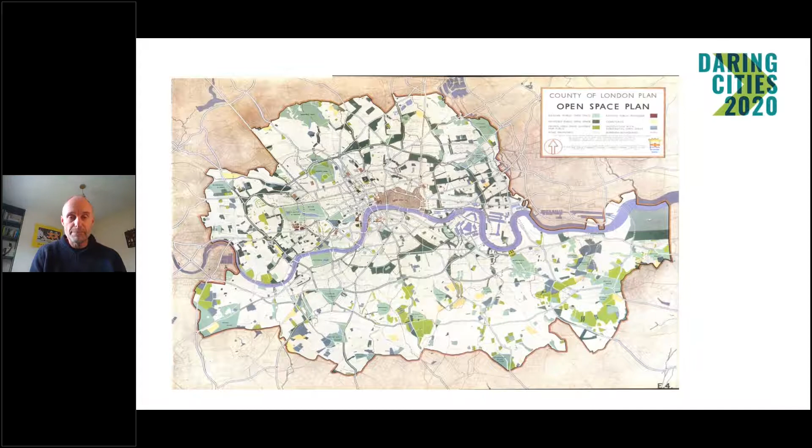Next slide please. So London today is a growing city, currently 8 million people.

We expect to have 12 million people by 2050. And that city has to become much denser than it is now. We can't spread outwards anymore. We have to become more dense.

But we also have to address issues around maintaining that access to green space, which has been a hallmark of London for decades.

And dealing with the modern challenges of a future city. Things like air pollution, which has been a critical issue in London. And the impacts of climate change, which not only have health impact, they have an economic impact. Many businesses in London now are very worried about the impact of climate change, particularly in central London, where it becomes unpleasant to travel during the heat of the summer.

So what are the sort of things we're doing in London to try and combat that, to try and create this healthier, denser, but greener city?

Some of the things we can do are to improve our existing green spaces. We can take existing areas of green space which don't perform particularly well and rewild them, recreate rivers to create a much more aesthetically pleasing green space, but also a green space that combats flooding and provides a whole range of protections and environmental enhancements and better for biodiversity.

So these are sort of things we can do in most of our parks in London, recreating sort of natural environments that are good for health and good for biodiversity.

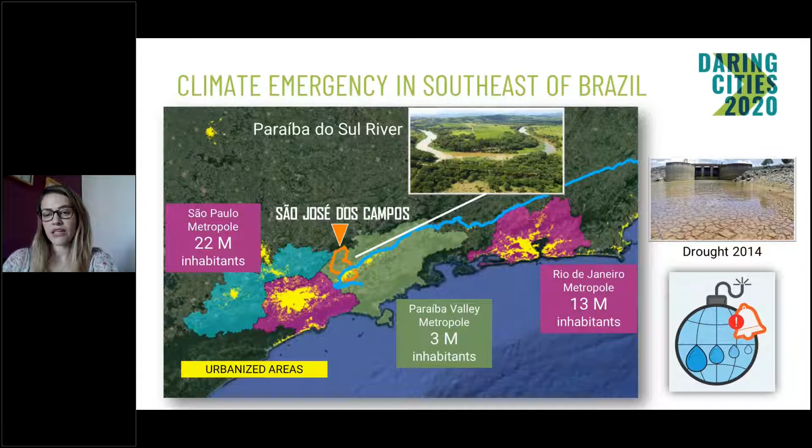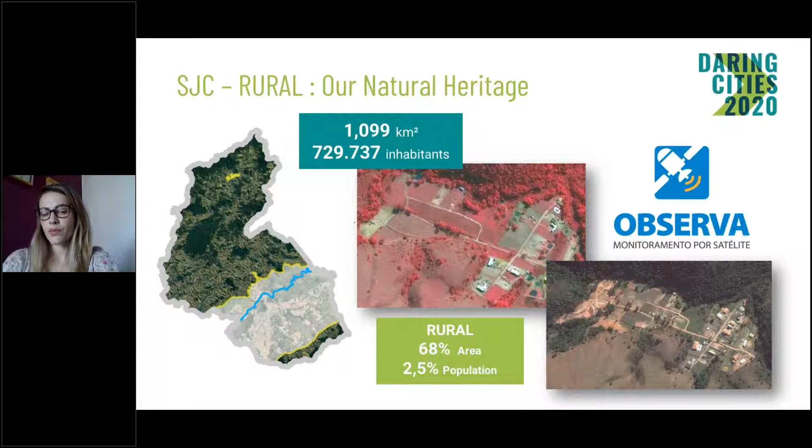On one hand, we need to conserve our natural resources in the rural area, including water, for which we have initiatives such as the satellite monitoring program and a pilot project of payment for environmental services. On the other hand, we need to provide quality of life to almost all of more than 700,000 urban citizens.

Giving a brief explanation about our urbanization process, it became more intensive in the 50s when a large highway connecting Rio and São Paulo was built, and the aerospace sector started to develop, attracting other industries like this refinery, which is the third largest in Brazil. It means that although the city is known as a hub of innovation, for many years São José has been only an industrial city and a good place for working.

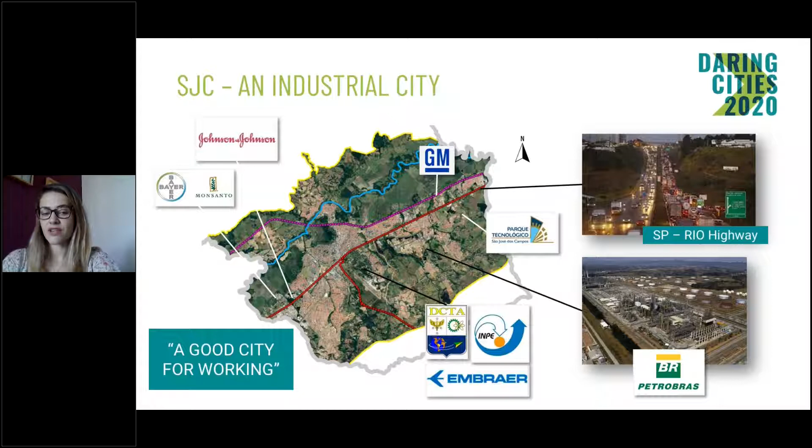So think about the Nexus: this urban development has created a lot of challenges in terms of health, especially air pollution, climate, and nature. Because of it, nowadays we have a really disconnected and monocentric city. Besides, the central and infrastructure areas are still losing population in a sprawling process, resulting in a huge amount of GHG emissions associated with transport.

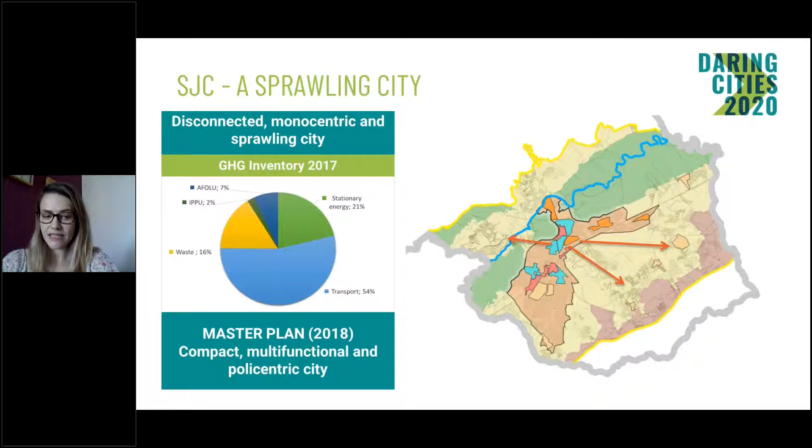To deal with this, our master plan has proposed a compact, multifunctional, and polycentric city. This year, COVID came, showing us that we need to make São José more livable and more sustainable, which can also be a great opportunity, once São José offers a strategic location and better quality of life for people and companies who want to leave big cities such as Rio and São Paulo.

So just to show what's happening in the city right now, we are improving our cycling infrastructure, including bike lanes in all new roads, and trying to adapt them into the consolidated city, which sometimes conflicts with trees, power poles, and sidewalks. As a consequence, even though we are encouraging more sustainable mobility, it doesn't mean we are managing to deliver green and healthy space all the time yet.

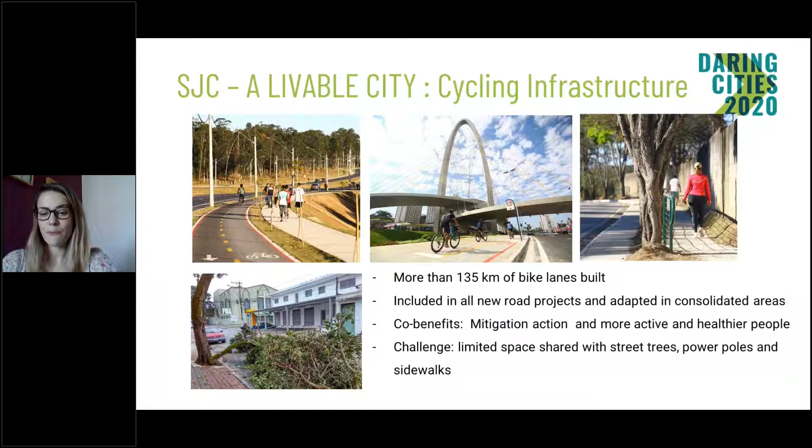This year, we also finished upgrading all the street lighting to LED, with more than 7,000 lamps. Connecting with the Nexus, it's a great mitigation action that provides a much safer place and helps reduce rejection toward trees and green space, especially in poor and peripheral areas. In this sense, I also highlight the tree census project, which is mapping all street trees and puts QR codes on them to engage people about the value of trees in the city.

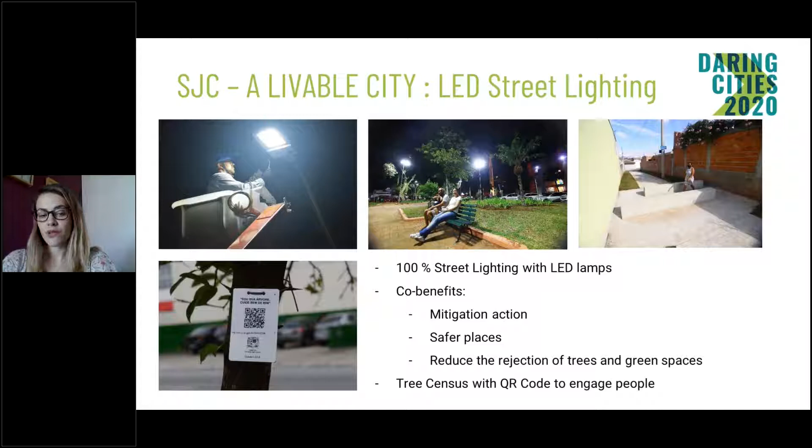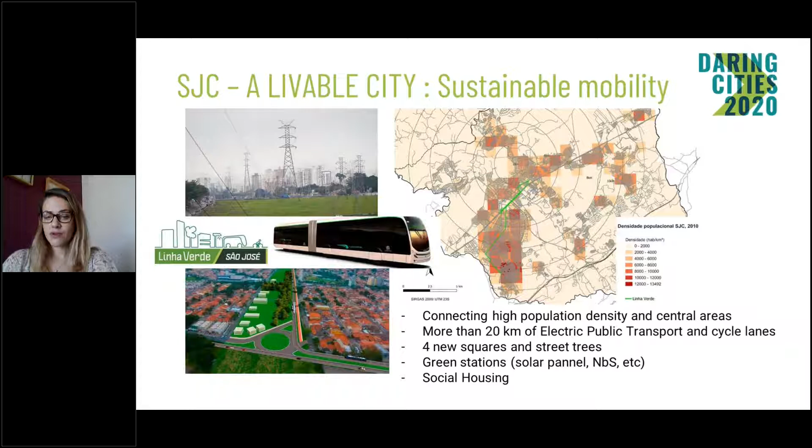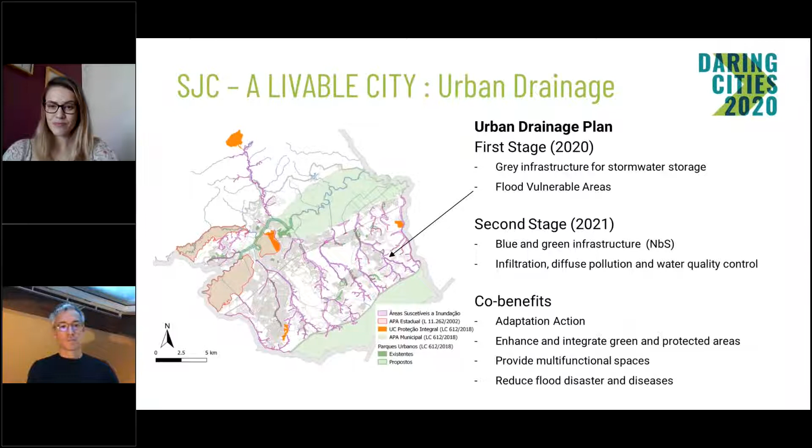To finalize, as an example of this approach, we return to the Paraíba do Sul River and its floodplain known as Banhado, which is a great urban protected area. Here, our intention is to create new parks and connect them with the existing ones in a kind of urban stitching. Thank you so much.

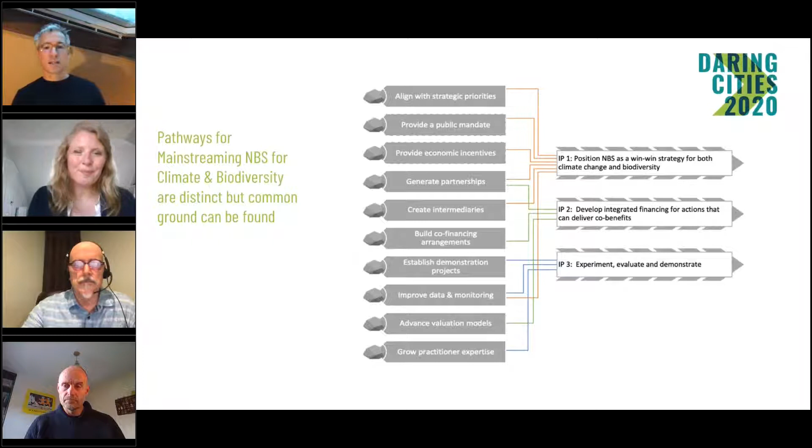We already have some questions coming in the Q&A box on some of these points, so we'll get to those in the panel discussions. But I definitely want to pick up on this complexity and how we sort of reduce unintended consequences and really work across the nexus.